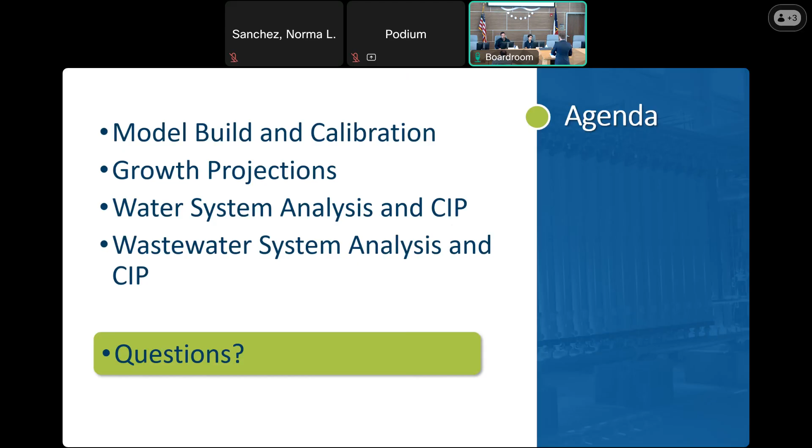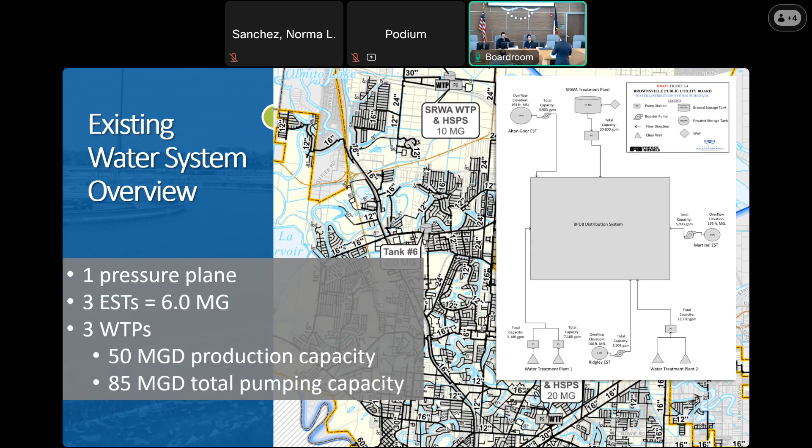The first task with this project is really trying to understand how our distribution system and collection system on the wastewater side work. What are the major facilities that are involved? What are our capacities? What are the transmission lines? That's kind of what we're showing there.

Then we go through and do field data collection. For the water system, we installed 20 temporary pressure recorders. We also pulled available SCADA information from all the facilities, tanks, pump stations, treatment plants, and got historical production information for the last decade, almost all the way back to 2010. We're trying to get an idea of how the system operates, how the pressures change, how demands change over time, and how the system has changed from a production and consumption standpoint over time.

And so that's kind of where we're stressing that system. And then we run our simulations in the model and try to match those observed conditions and see how those lines match there. So in general, we feel like we have a pretty good understanding of how the water system operates, and we're able to get our hydraulic model to really well match the conditions of the existing water distribution system.

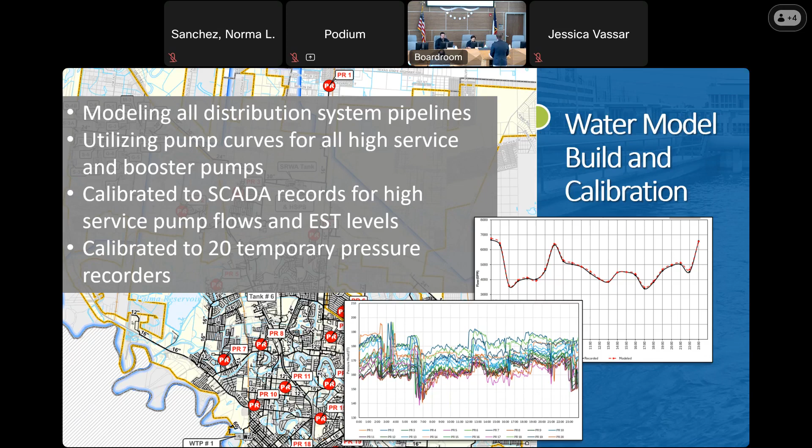Thank you. So yeah, kind of similar on the wastewater side, right? So like I was saying, where the elevation kind of benefits us here down in the valley, it bends back and bites us a little bit on the wastewater side. Because it's so flat, wastewater systems are typically gravity driven. So when you use your water, it goes down your sink, what have you, they flow through gravity in the same way a river would flow, kind of to the ocean.

There are wastewater gravity mains flowing to our treatment plant. Unfortunately, when it's really flat, you've got to dig those pipes really, really deep to maintain that gravity fall throughout the system. And we utilize what's called lift stations to boost that flow back up. It gets exponentially more expensive to continue digging lines, especially around that 20 to 30 foot range, which is about as deep as we can go. So the BPUB wastewater system has 177 total lift stations.

Don't quote me on this, but based on work experience around the state, I believe you guys are second only to the city of Houston in terms of total lift stations on your wastewater system. Yeah, it's a very, very complex system. And I think that's really important context to provide. Talk about the water system, relatively simple.

Well, the wastewater system is fairly complex, especially relative to your peer utilities in the area. And that's going to come out in how we have to maintain those systems. That extra complexity makes it hard. It's a challenge that you guys are faced with to maintain that level of service that you have today. So, question? Yes, ma'am.

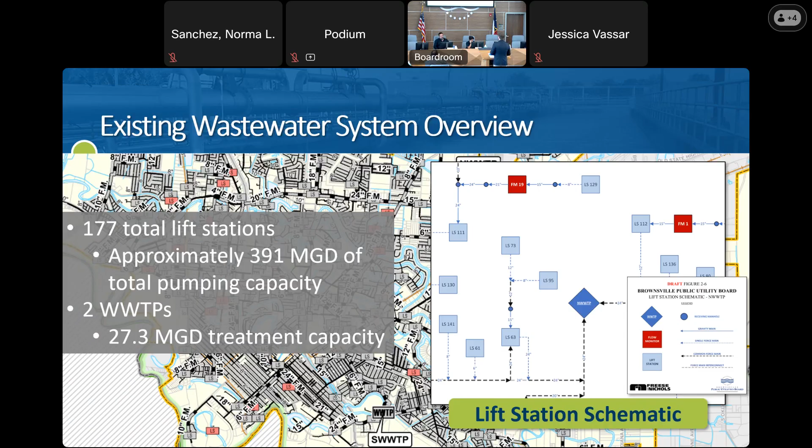Credit to staff and the information they have that allowed us to pull all of that. I say approximately because about 10 of them we just don't know - they're too old or too small. But we add all of that pumping capacity, so if every single pump in your system were to turn on at the same time, we'd have 391 million gallons flowing through that system at any given time. It doesn't really happen that way, but it provides context. That's a good question.

Okay, so next piece - that's our understanding of the existing system. Now we dust off our crystal ball and try to think, okay, what's going to happen in the future?

Fortunately, the city of Brownsville did some extra work leading up to this project where they looked at what's called traffic analysis zones county-wide to evaluate potential growth areas, where our existing customers are, and where potential future development is going to occur. There's lots of numbers and stuff in there, but ultimately we use that information to project out our future growth.

Staff was able to provide us with about 3 years of historical water billing data dating back to 2022, 23, and 24. We used that on the water customers - typical billing stuff you get in the mail, pay your water bill - and that's what we used to distribute our existing connection counts across both systems.

The assumption there is that most customers who are water customers are also going to be wastewater customers. Like we talked about, that's not true in all cases, so you see some minor differences, both currently existing and out into the future. But we took all that available information and processed it down.

We worked with staff to identify potential future developments, and then we phased them through what we're calling build out - roughly 2050. Build out is a moving target - you may have a commercial area you think is built out, and then some developer wants to put a skyscraper or something. That's just the general process of how cities develop.

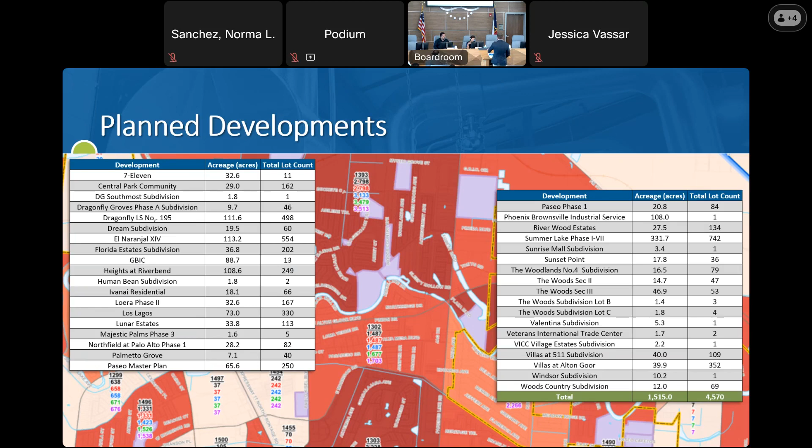So you're thinking that these water and wastewater systems will grow by 50% over the next 25 years? Yes, roughly, absolutely. Okay, any other questions on that?

And this will be all really on the outskirts? Yeah, you can kind of see that map in the background, though it's hard to see from the scale. The vast majority of it is in some big development areas in the northwest, and as well as the southeast, with a little bit interspersed. For some of these specific developments, we really drilled down in the existing city center, looking at a fairly large vacant parcel and asking how many units are we anticipating at that level. So there's a little bit of what we call infill development that occurs in the classical definition of the city of Brownsville, but most of that growth is focused on the outskirts.

So new connections, what does that mean? That's a great question, and it's a conversation we've had quite a bit going through this process. It's intentionally a vague term, right? We're trying to keep it equivalent to a connection to the system, i.e. a meter that's installed. There are some equivalency factors there - how do you differentiate between an apartment complex that has just one meter versus another apartment complex where each unit is individually metered? So we're doing some calculations on the back end to come up with those equivalents, and overarching we're saying that's a simple connection. You can equate that to a population - I think it's 3 people per connection based on some of the other planning data.

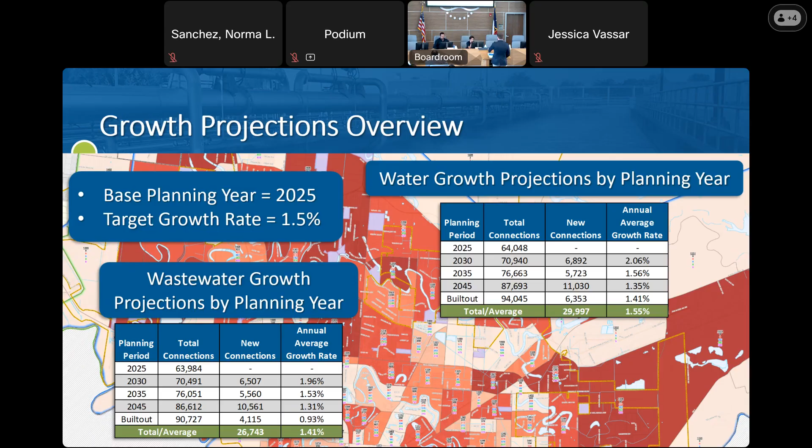So now we're equating - okay, that was just connections. Where is this new development going to occur? Now we go back and say, okay, how does that impact the two systems? We're converting that to water demand - what is our consumption - and then wastewater flow, what's that flow generation look like? There are some conversion factors you can see there.

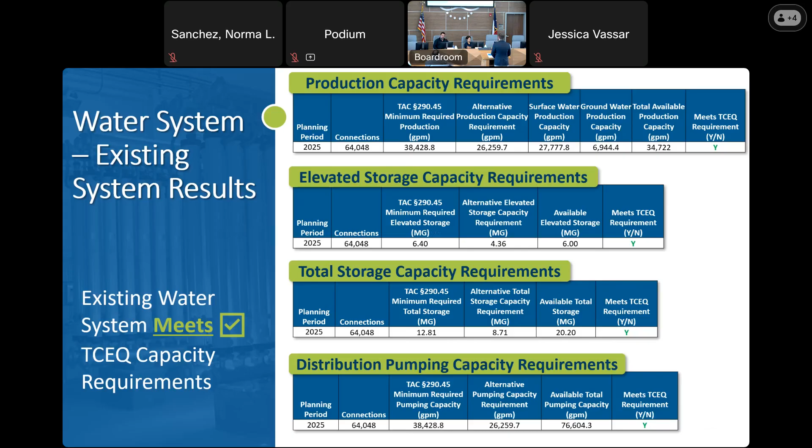So we evaluate production capacity, like we talked about. It's also elevated storage and total storage, and then distribution pumping as well, being able to meet peak demands throughout the system. We'll get into the specifics of each of those tables and the actual numbers, but the takeaway here is that your existing water system is in good shape.

The primary limiting factor for fire flow is just having appropriate—it's the maximum sustained flow rate that the distribution system can handle. It's called fire flow because during an emergency event, a fire event, if the fire department hooks up to a hydrant and wants to pull as much water as they can, this is an approximation of how much water they can pull out. So 1,500 is that kind of rule of thumb—anything greater than that is good.

Again, some developments, a big industrial customer, may need higher requirements, and anything lower than that's not necessarily bad, but definitely something we want to be aware of and try to fix in the future. The primary restriction for fire flow is looping—having multiple ways for the water to get there usually gets you enough capacity.

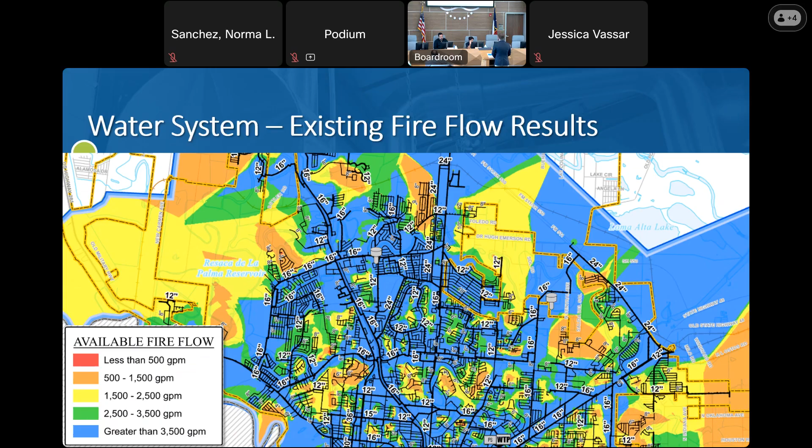So a lot of these areas in orange, it's just because there's only one supply line. As long as we can bring in that second supply line—and we've got some examples of that—these values get a lot better in the future. So we'll continue looking towards that.

We've got to be able to solve that. This is the worst case scenario—the single highest demand hour throughout any given year. So it doesn't happen very often, but we still want to stress the system to that level. And as you guys see, doing great.

I think the minimum existing pressure in the system is right at 40 PSI, which is kind of what we would recommend, above that threshold. So the system's in good shape—we just want to continue to make sure we can do that moving forward.

So on your treatment plants, we have a node in the model that models the suction side of the pumps, and those are just based at atmospheric pressure, so they're like at 0 PSI. But because you're not actually serving the customer, those don't actually count. So you see a red if you look really closely, that's likely what those are. But like I said, minimum distribution service connection pressure is about 40 PSI.

Yeah, I see a couple of orange, but—and again, that's that kind of like, okay, orange is maybe still meeting the requirement, but getting a little bit close to comfort, right? And so we want to make sure that we can enhance those pressures moving forward in the future.

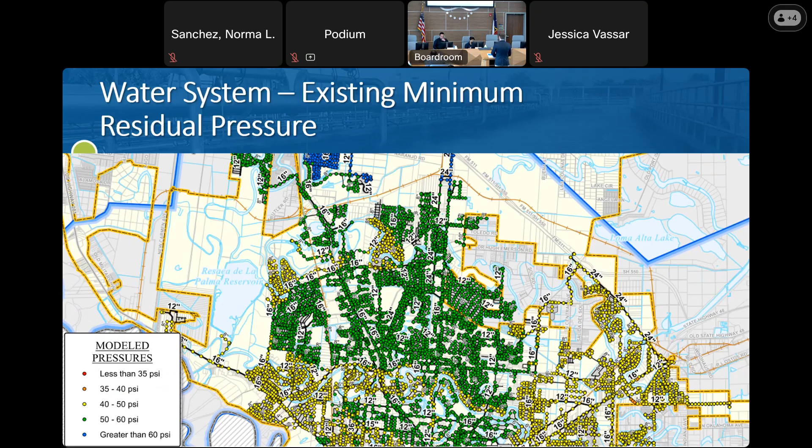All right, so that's the existing system. Now we take that, we apply our growth projections, and how does the system perform moving forward into the future?

Staff is working on where's our plan, we have some plans in place to be able to get that information. Really all we're looking at here is the timing. From a budgeting standpoint, when can we start accounting for these? We're going to need these projects. We want to make sure we've got plenty of heads up on that. We don't want to get too close to those requirements and then, oh no, it happens faster than we thought and we don't have the answers.

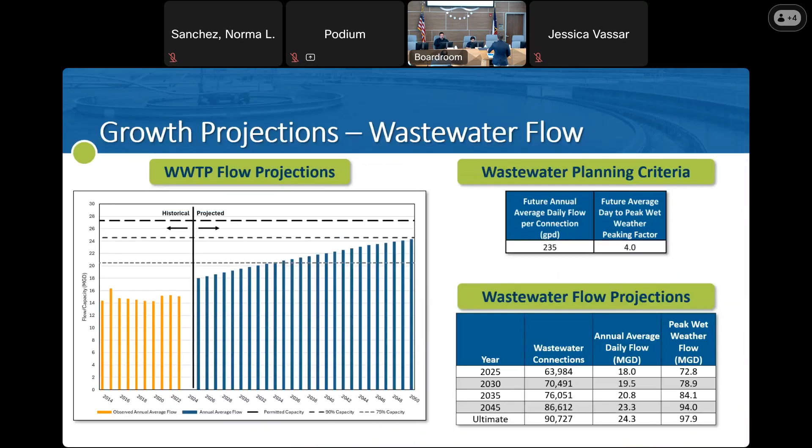The alternative one? Yep. And I didn't mention, I think I forgot earlier, let me go back to the slides for you. You see that table on the top left? We talked about that 335 of your average consumption per connection, but that max day peaking factor and peak hour peaking factor of 1.5 each - typical rules of thumb there are 2.

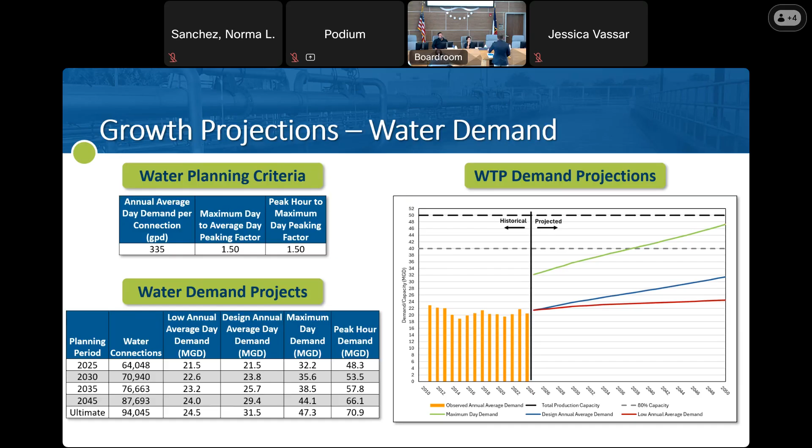So again, you guys can't go less than 1. So you guys are in a really good spot there with how the system has been maintained and operated, and even again how your customers have been using water historically. We continue to do that, continue to kind of leverage those things from a capacity standpoint. That ACR is where that comes out regulatory, or how it applies to the regulatory requirements. So as long as we're able to keep that moving forward, we'll be able to stay on top of that.

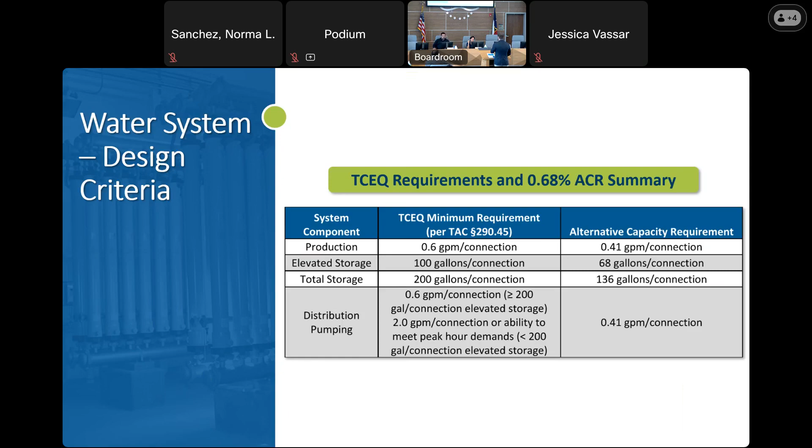And this is the table that shows that ACR requirement, 0.68%. So, why do we ignore the minimum required production? Because BPUB has gone through with TCEQ, the alternative capacity requirement. We have that active. TCEQ has those requirements for a typical system, because you guys are atypical, right? Your system's in good shape, it's very efficient. This ACR is how we change the regulatory requirements, and TCEQ has approved that to apply like a moving waiver forward. Yeah, exactly, it's a waiver.

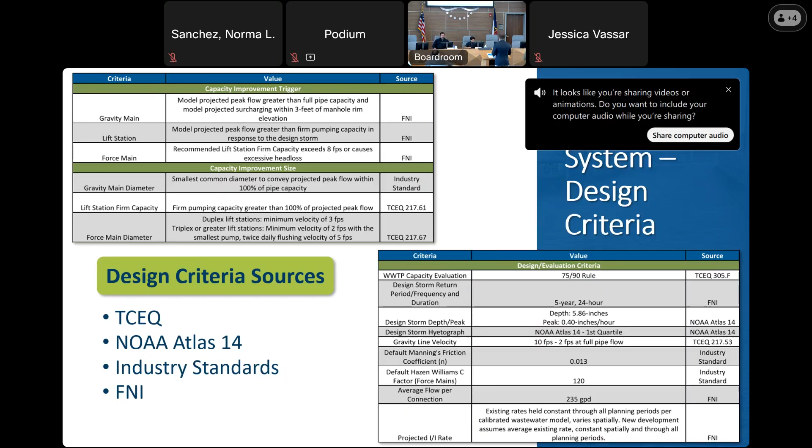Okay, anything else on water? Okay, wastewater next. So unfortunately, the water requirements are very prescriptive. We've got to meet all of these different requirements. We don't have that same thing on the wastewater side. There's a little bit, but for the most part it's just don't have sanitary sewer overflows, don't spill wastewater out of the system. How we do that, we take a look at some other sources, industry standards, and rules of thumb that we come up with based on our experience. I'm not going to go into detail on all those tables, but this is the design criteria that we've assessed the wastewater system on.

Okay, the big one I want to point out is this design storm. So we utilize NOAA Atlas 14 - that's the National Oceanic Atmospheric Administration. They do a ton of work, it's really cool stuff if you're interested in this kind of thing. They go back, I think it's like 300 storm events historically, and evaluate it locally - what are the most common storm events observed in the area. We come up with what we call a design storm. This is a synthetic event, it's fake, it's not real, but it's how we assess that system, the wastewater system, moving forward. Most wastewater systems are most sensitive to wet weather events, so we want to come up with a representative wet weather event to assess the system.

And what we came up with is this 5-year, 24-hour storm event. The 5-year is basically how significant that storm is - it doesn't quite work this way, but roughly you can expect the storm to occur once every 5 years. It's called the 20% annual probability of exceedance. And this is kind of what that shape is. The duration and what's called the hyetograph, how it changes over time, that's based on historical events. So what Brownsville and the Valley area in general is most sensitive to are these big sustained storm events. You're not like North Texas, getting huge thunderstorms that are really high intensity and short duration - it's these long events that bring a lot of volume, maybe not high intensity. That's just kind of what that representative storm looks like.

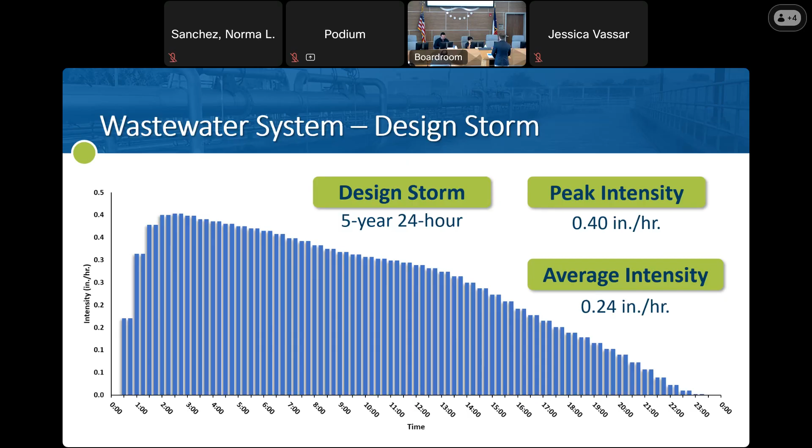So we apply that to the existing system to assess collection system capacity - what is the capacity of your wastewater system? When that storm event hits, when customers are using, flushing their toilets, all that kind of thing, on top of that storm coming in, and we have RDII, rainfall entering into the system, what is the system's capacity to convey that flow through the system without spilling? I want to stress, this is a desktop analysis. This is a synthetic storm, it's not real - this is how we're assessing that system, and we want to be stringent on how we provide that assessment.

So of the 177 or 160 lift stations that we have actively in the model, we're showing 50 of them to have actually experienced peak flows greater than what's called the firm capacity. And then another 16 that are greater than the total capacity. The total capacity is - you've got pumps, all the pumps in that lift station turned on. Firm capacity is where we assess redundancy - so again, if the pump goes out, you lose power, something like that, it's in the shop for maintenance, we always only have 1 extra pump in the system to have some redundancy.

Ultimately, our design criteria is assessed on providing firm capacity to convey peak flows. If you add those two together, that's 66 out of 170. So we're about 40% of the system showing issues under this worst case scenario event. That's kind of how we establish those criteria.

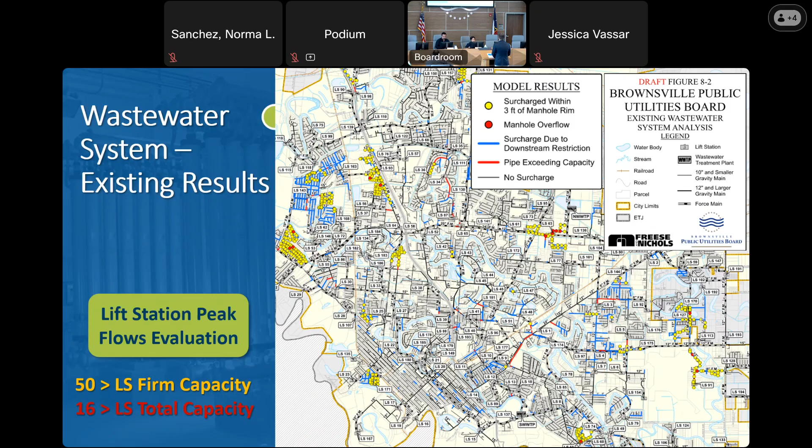Thank you. Yeah, it's a good question. Thank you.

Okay, so again there's a bunch of numbers on here. You guys have 177 lift stations, so they're not actually all shown on this table. But again, just trying to show you, okay, so what we do is we use our model, we use our growth projection, and for every single facility we're looking at what's the capacity, both total and firm - that firm is kind of redundancy sake. And then even the force main has a capacity as well that we're assessing. And then projecting that both existing in '22 and 2025, and then all the way out through 2050.

So lots of numbers on here. And what's important is as they change, as new development occurs, or maybe we have some projects to reroute force mains to some other areas in the system, those flows are going to change. And so when we're expanding facilities, we want to make sure that we have enough capacity both for flows today and what we're anticipating out into the future. So this is just an example of how we perform that analysis on every facility throughout the collection system, but also through all of our future planning phases.

Okay, and you're prioritizing. Exactly. Yep, exactly. We'll get to that in just a second.

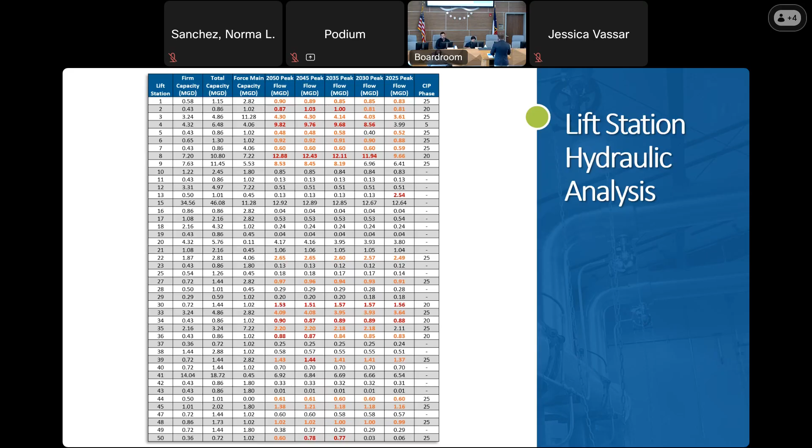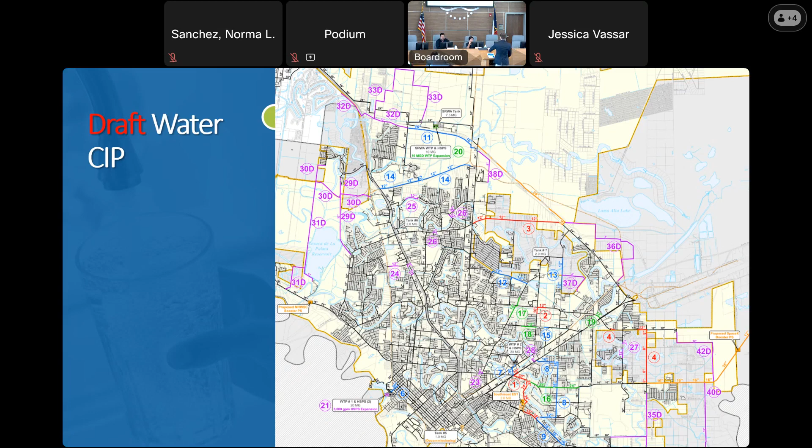Okay, here's a big one. It washes out, I apologize for that. So what we do is we evaluate all these projects, pipelines, pump station extensions, tanks, that kind of thing, and come up with cost estimates. Those cost estimates are based on historical projects, things you guys are working on right now, and other projects at other utilities in the area.

And again, we want this to be conservative. This is for budgeting purposes. So our goal here is that if we say a project's going to be 5 million, maybe it comes in at 4, maybe 4.5 - that's great. We don't want it to come in at 6. So we're trying to be on the high side to make sure for budgeting purposes that we have enough funding available.

These again are prioritized. So anything shown in the 5-year is identifying some of those limited existing system deficiencies on the water side that we identified, but also continuing to enhance capacity as system-wide things grow into the future. What's shown in red, we're budgeting roughly to be implemented in the 5-year period. Blue is 10 years, green is 20, and purple is kind of for future growth out into the future.

So you can see over the 5-year period, we got 32 million, and then between 5 and 10 years that increases to about 50 million. The total numbers are really big, but if you dig into it, that line item 20 at the bottom of the green, that's our treatment plant expansion.

So we're anticipating, and have worked with staff to identify, expansion to SRWA's brackish groundwater treatment plant. Unfortunately these treatment plant projects are just really expensive, so we think we're going to need that - we're anticipating that into the future. But that's the single largest line item there, more than half of the total cost.

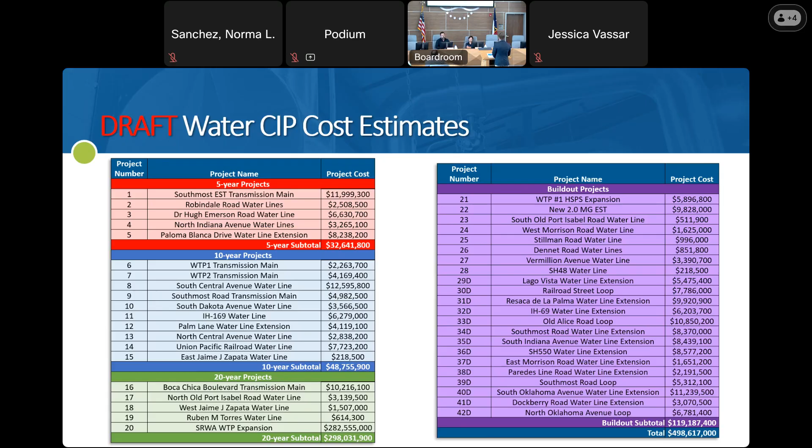So that's water. Now we go to wastewater.

Again, kind of zoomed out here. It's hard to see, but same general process. We prioritize projects in the 5-year window. Anything in red is high priority, and then we phase out from there. Blue is 10-year, green is 20, purple is that long-term build out, 25 years.

So what we did is change our assessment to say, okay, we want to be able to provide firm capacity for all your lift stations. You've got so many lift stations, you're primarily a lift station driven system, so how we assess and plan for those kind of changes for the wastewater system moving forward. We're going to plan for firm capacity, but we know we've got total capacity, we have that extra pump. In a worst case scenario, we can't account for that.

So we've adjusted our phasing to say any facility that experiences peak flows greater than firm capacity, but less than total capacity, is a lower priority than something that doesn't even have total capacity to keep up. Even if they don't quite have total capacity, if there's enough storage available in the system to not cause a projected SSO, we can attenuate that peak flow and store it in the bathtub, so to speak. Those are even lower priority than the ones where we anticipate not enough storage or pumping capacity. So we've broadened our assessment criteria and prioritized accordingly, focusing only on the most important aspects of the system, the most critical capacity restrictions.

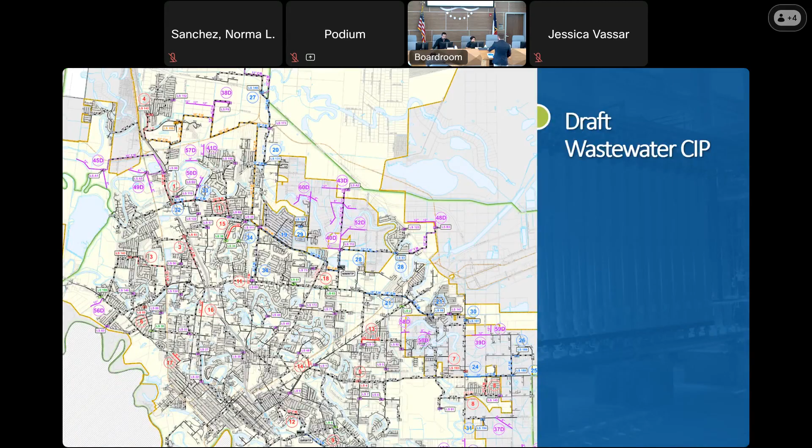It's funny, as we were having conversations about system capacity with staff, Marie said wait a second, this project you're showing right here, we're already working on that one, when we were going through the initial draft.

So it's really good as a gut check for us that we're on the right page, but also good validation for staff that they're aware of these issues and working towards them, staying on top of things. So the primary, number one problem, we've already got a solution and it's about to go to construction, right? So we've got that problem solved. Now we're going on to the next one, one step at a time.

I think that's the majority to talk about on the wastewater system. Again, it's such a complex system—lots of rerouting force mains and trying to find available capacity. This lift station doesn't have capacity, but if we pull it off and send it elsewhere, there is enough capacity. So lots of changes, and it's going to be a process. What we're trying to lay out here is a plan moving forward. We can say this project's going to solve this problem and have enough capacity for the next 25 years, then move on to the next one. So we're outlining that plan and implementation strategy and prioritizing accordingly.

Okay. Go ahead, you have a question?

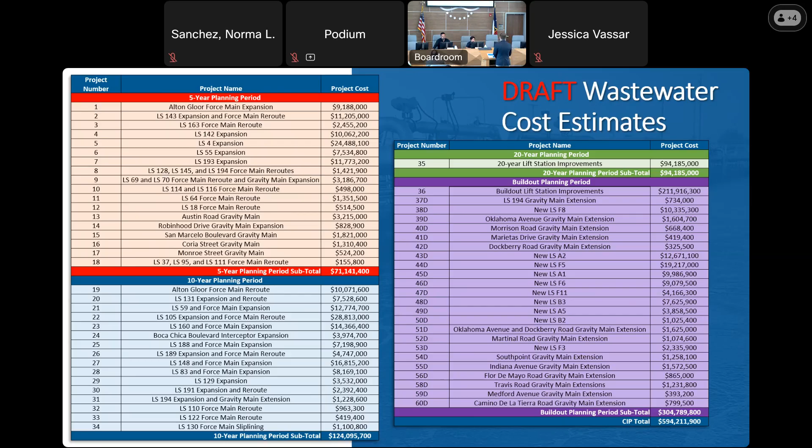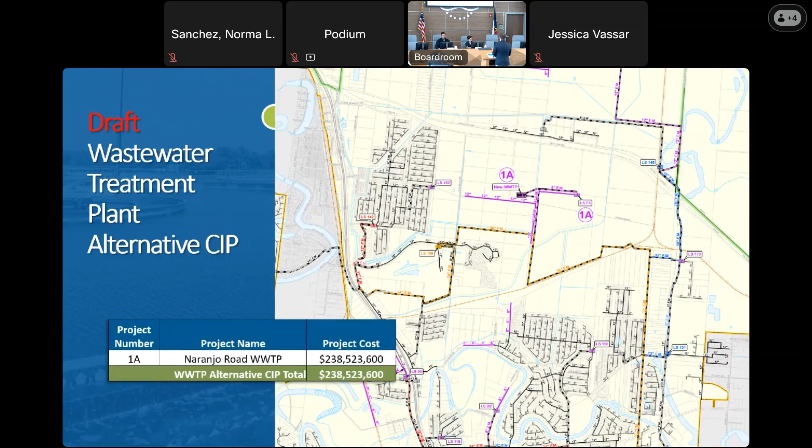So that's what we got there. What's next—path forward. Like we talked about, we're wrapping this stuff up. We're going to present to the board early next month at the next board meeting. And then we're going to get going with the impact fees and have that available funding mechanism should we choose to use it, or how we implement that. It will be available to us if we get going on that.

Okay, so thank you for your time. I'm not wearing my watch today, so I have no idea how I did on time, but I very much appreciate the opportunity. Any other questions or anything? No, it's great, very informative, thank you. We'll wait to see if there's any other questions from the rest of the board. Yeah, absolutely, absolutely. Great, well thank you so much. Thank you.